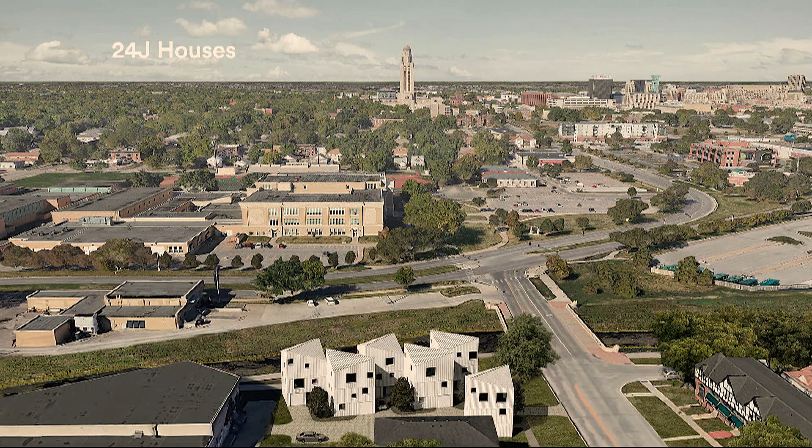So we work on many different kinds of buildings, but today I want to talk about houses, how we think about them, how we design them, and how they represent the act of living. And I want to begin with a question: why won't Americans accept the promises of social housing? This is a question that's bothered me for most of my career, and responses to this often assume that the issue is about access to housing relative to financial, social barriers, and then urban planning problems, potentially a problem of misaligned policy. But we argue it's also a cultural problem, a misalignment between the mindset, imagination, and desire for places to live with other people.

Like many multifamily projects, maybe most multifamily projects, the articulations of the building may attempt to adjust to perceptions of scale, but they rarely correlate to the individual home within them. And sometimes these articulations are due to planning restrictions, urban design guidelines, and so on. But we aren't seeing the home, we're seeing the collective. And I think this is a challenge for a lot of Americans who still have a desire for the single-family house.

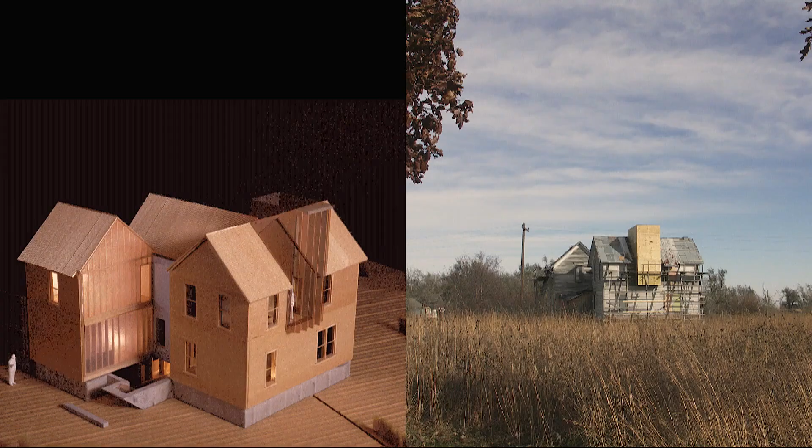In writing an update to J.B. Jackson's evolutionary story, David Heymann, who's a professor at UT Austin, states that Jackson uses this westward movement to document changes in the value and nature of land, from a source of connection to a foreboding cosmic order, to an optimistic and limitless physical commodity, and to a disconnected and transformable economical value in each case of the landscapes he describes.

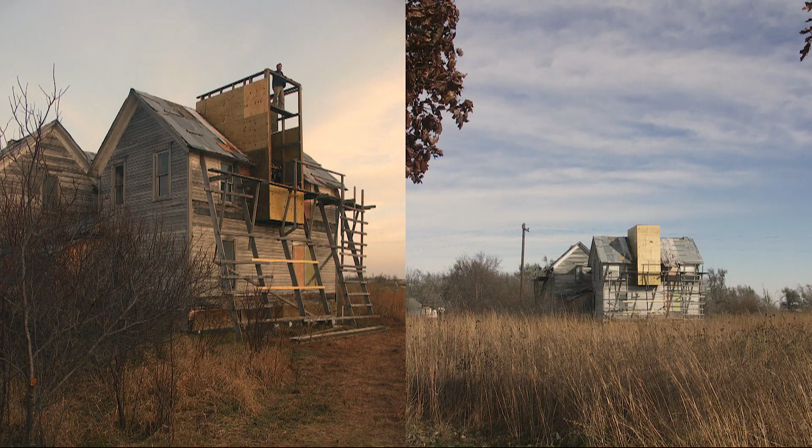This project here, just briefly to describe it, is we bought the house, moved it to Art Farm, working with the students, in fact, started to convert this as a space for artists, particularly writers. There are other buildings at Art Farm that function as art studios for painters and sculptors and conceptual artists, but this is really a place for writers to gather and to sort of observe the land and to work on their projects in a very challenging environment.

So jumping very quickly here, Le Corbusier, one of the most famous architects of the 20th century, wrote that a house is a machine for living in, but it is also a device for framing the relationship between people, buildings, and landscape. The cartoon here on the right is, I think, one of the most important works of architectural history. This is a Mexican cartoon from the 1960s about the life of Le Corbusier. Very interesting and full of action, maybe action that didn't really exist, but it's fun to read.

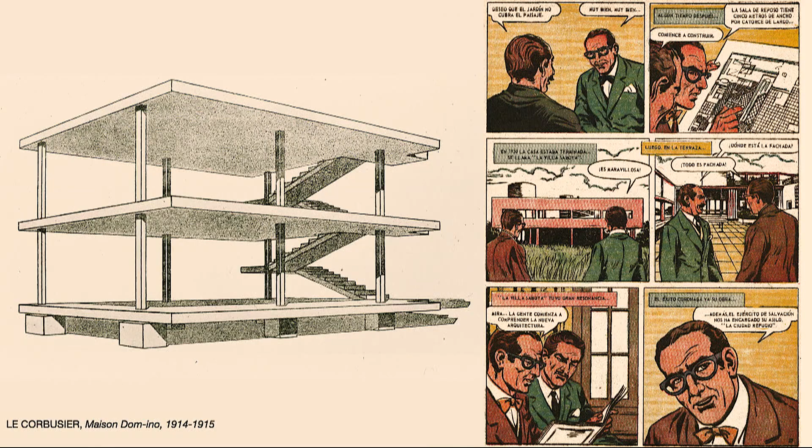And in this, the client is asking Le Corbusier to design him a house that is open to the garden, but that doesn't obscure the landscape. The result is Villa Savoye, one of the most famous houses from the early third of the 20th century. And Le Corbusier didn't just design a house to work with the landscape, he changed the fundamental relationship of architecture and landscape, lifting the garden to the roof and opening all the walls to the surrounding landscape with a ribbon window. At the end of this passage in the comic book, the client says, "Well, where's the facade?" And Le Corbusier says, "It's all facade," which I think you could read in multiple ways.

But so ultimately, Le Corbusier reduced living in a house and the life of a house to a sort of discrete set of mechanistic techniques that he called the 5 points. And architectural history can take it from there. I'm not going to spend time on that. But these experiments to imagine the house not as an artifact stuck in history and psychology, but as a response to new ways of living and the current demands of society taken head on, these are more interesting to us, I think, in the sense of how the house is changing over time.

In the 1940s, Austrian-American architect Friedrich Kiesler argued that Le Corbusier's functionalist manifesto Towards a New Architecture, in which he claims the house is a machine for living in, served as an important guide for architects between the First and Second World Wars, but that a new manifesto was needed after the Second World War. He argued that it's a fact of growing importance that the house of the family is not only a machine for living, as Le Corbusier put it, but it is also a nervous system.

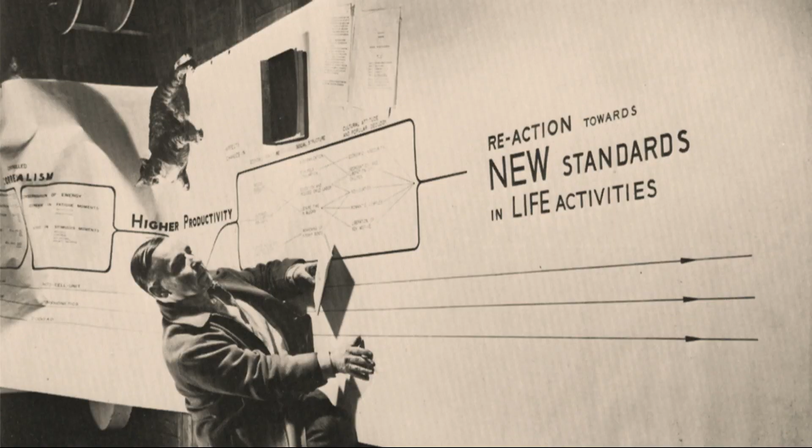So some of our own work takes a rather different approach. Rather than thinking about this as a holistic way of merging life, we took a project here, we called it Hexad, and pushed in the opposite direction towards a kind of extreme functionalism. This is actually an art/architecture commission that remains unbuilt at this point, where we used a pure form to examine a kind of siteless architecture that takes the Jefferson Grid as the site itself.

So settlement, as we know, depends on an infrastructure and an ideological attempt at organizing territory, wiping out what existed before and establishing a new order. Our project asks, what would a house that followed the now obsolete rules of the Jefferson Grid actually look like? So the grid that we live in is based on a series of obsolete measuring devices.

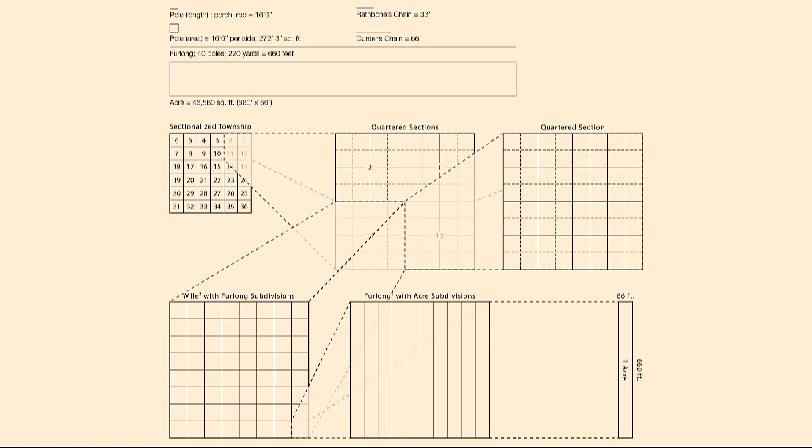And not to spend too much time on this, but it is worth noting that about 75% of the continental US is based on the stamina of 18th century oxen. Odd to think about that, but when you drive down county roads, think about what you're driving through.

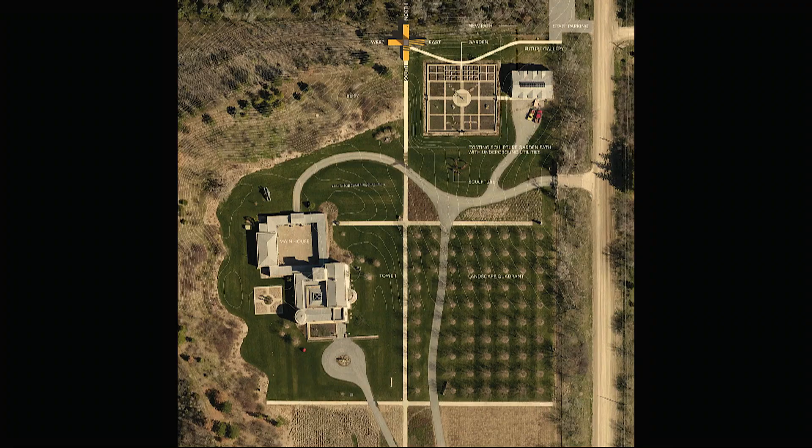Our site was on a property, a large property outside at the edge of Lincoln by the 80 to 180 interchange. A residence established there and a building designed by the historicist architect Dimitri Porphyrios that also has a miniature grid within it. And we were commissioned to design a residence for a caretaker that would also act as a part of the sculpture garden. So trying to find a form that works, a three-dimensional form that works with the grid, just as rational, just as unforgiving.

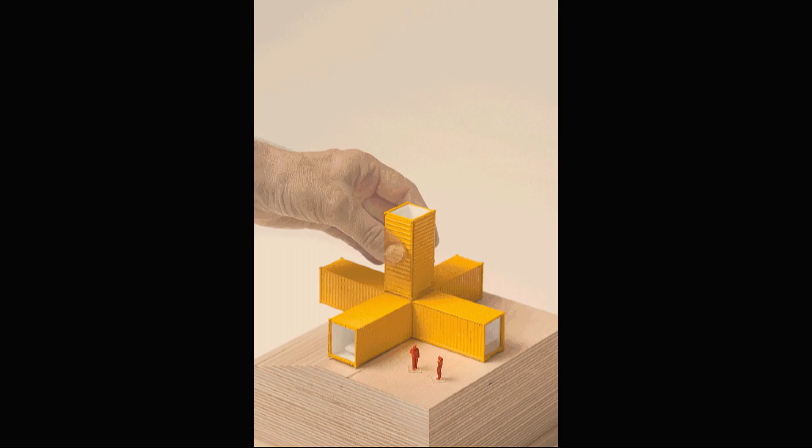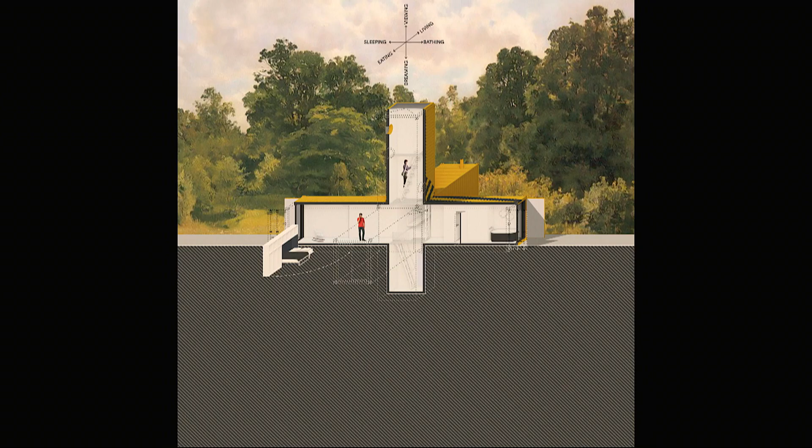We finally settled upon this, which is a tetrahemihexahedron for any geometry fans. A pure form that allowed us to think about the pure inhabitation of limitless space here. The client wanted to build this out of shipping containers, so we sought a way to combine containers together into a form more or less like the pure form of the tetrahemihexahedron, and then started to divide the living spaces into the various sort of vertices of this as they extend out into the landscape.

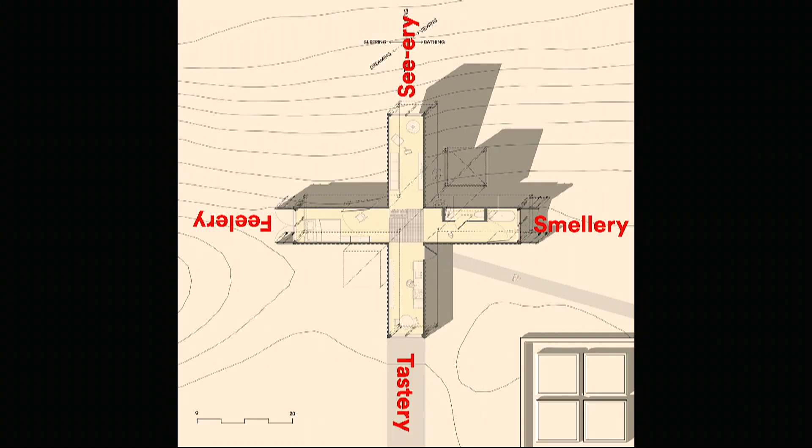And the hyper-rationalization of the building sort of leads to a hyper-rationalization of how one lives in a house, so dividing functions into pure spaces, the living, the bathing, the eating, sleeping, and so on. Also made me think about Georges Perec's Species of Spaces, if any of you have read this, where he argues that maybe we should start naming our rooms after other things such as senses, so the seeery or the smellery or the tastery and so on. Or days of the week, which today we'd be in the Tuesdayery, but UNL can't afford that many lecture halls, so we have the everydayery here. But Perec also argues for useless rooms, not only rooms that have no precise function or multi-purpose rooms as we call them today, but entirely afunctional spaces.

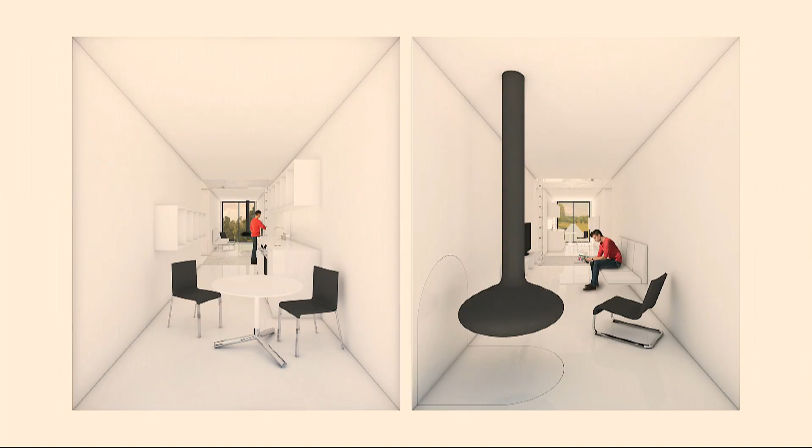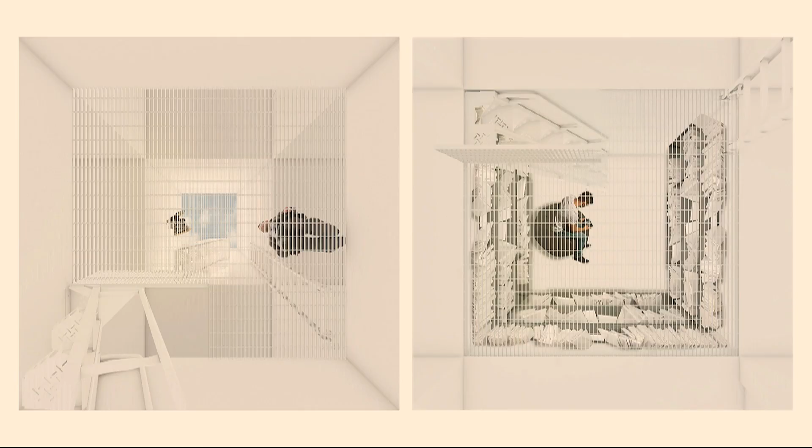So in this project, the horizontal axes of the tetrahemihexahedron are divided into the eating and living spaces here, or in this side, the sleeping and bathing opposite one another. And then in the center is this uninhabitable space with a grid that's just a grating, so you really can't do anything on it. And it's a space without use, as the Dutch architect and situationist Constant would say, a coincidence room. Finally, we've got the two vertical spaces in the vertical axis, the subterranean and the aerial space for viewing and dreaming above, and space for reading and contemplation below.

And not just by chance, I happened to grow up in this town of Christchurch for part of my youth, so about 5 hours away by car. So it's familiar territory in some ways. The house sits in a former sheep station that's now being restored to a more or less native landscape eventually. The house has views. Every room has a unique view to this landscape looking out at the Southern Alps.

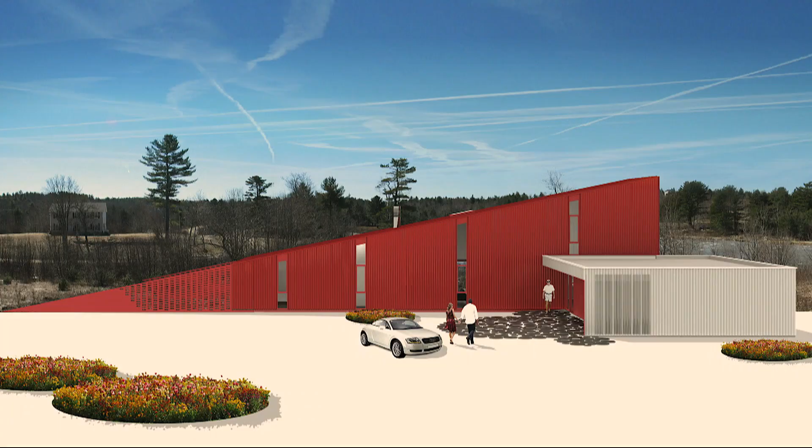But we had this design, and we were commissioned to make it a house plan set for sale on a website called Hometta. We made a few modifications, but ultimately, basically, the house is what we designed for Maine.

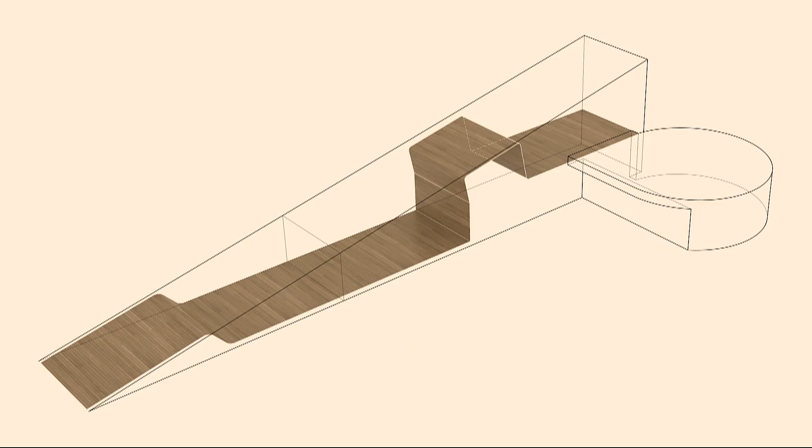It's really a simple dwelling that divides spaces into two basic categories. There's the level of living on the ground floor, living room and dining area, and master or main bedroom, and then two other bedrooms on the upper level. So a smaller program upstairs, a larger one below, and this sort of ribbon-like spatial divider, in the case of the house being in wood, sort of wraps those spaces and defines them very clearly.

Just because you think architecture is expensive, there is a free download for a gingerbread house version of this, if you happen to want this. So think about this at holiday time next year, or later this year. I haven't actually made it, but it seems fairly straightforward.

So the original wedge house, if you think of it as a ready-made, then in the sense of Marcel Duchamp's work, the Wanaka wedge house is an already made. It's like a remaking of a ready-made. An instance fitted to a specific landscape, and in this case, our role as the designer is not to design something new, but to take the existing already made and fit it and adjust it and edit it to work on this site.

So we did make some changes. We made it a couple of feet longer, dealt with orientation, of course, and the roof height in order to meet planning codes and other rules. We also changed all the materials. It's built in an entirely different way, based on New Zealand construction systems and using the New Zealand vernacular of painted corrugated steel, and then interior spaces that all open up into the landscape in very interesting and different ways, highlighting close moments as well as those in the distance.

The top and the bottom of the wedge become really different environments despite the rigid form of the building itself. You have the high piece facing up to the ridge. The low end of the project merges into the landscape at a rock where we sited the house in a very peculiar way. And then it just sort of dies into a beautiful garden and protects from the wind and creates an outdoor space for the two residents. But the severity of the form is maintained from the very tip at the bottom to the very top, and it's very unrelenting in its form.

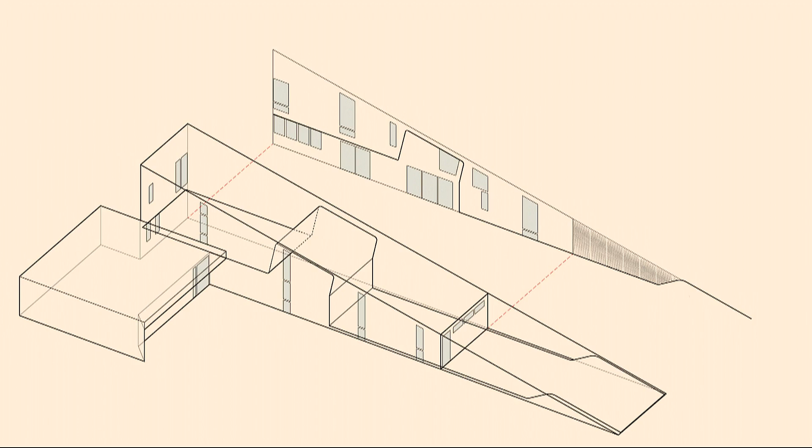However, the windows and the fenestration, as we call it in architecture world, are much more chaotic. They don't conform to the geometry of the building as much as to the way we live inside it. So the windows alternate between views and ventilation functions, solar functions, and so on, and are defined by the interior spaces of the house. It faces northwest towards the Southern Alps into the valley with the Lake of Wanaka off in the distance.

And then as you can see in this section image, there's the double height space with the living room kind of in the middle, and then a space with 2 bedrooms above, a bathroom above the kitchen and dining area, and then the main bedroom on the other end facing the garden.

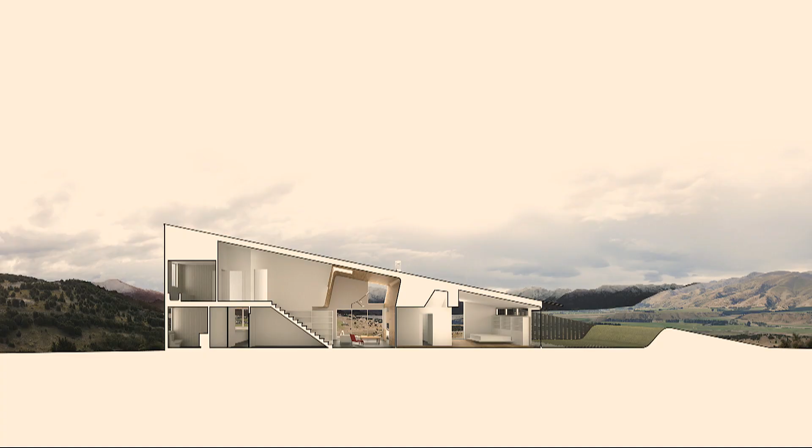The spaces are conformed to the geometry of the house and then are alternated between the 2 levels at this end with this wrapping kind of wood surface that curls around the space, allowing one of the rooms up above to open to the space below, and then to articulate a kind of a connection between upper spaces and lower spaces in a very simple linear hallway that runs the length of the house.

The materials on the interior, the concrete floor has pebbles from the Clutha River down in the valley, and it's ground so that those are exposed almost like a terrazzo. They have a really nice collection of contemporary New Zealand artists, so we worked around some of those artists to think about how that work would be displayed in the house.

And then the wood that you saw throughout all these images is eucalyptus from a farm in Canterbury, a few hours away, custom milled to wrap these curves and fit the house.

For any assistant professors in the room, the wood is actually a retirement project created by a sociology professor in New Zealand who, when he was an assistant professor, planted a eucalyptus tree farm. And then when he retired from teaching as a full professor, he harvested the lumber and he mills it and sells it to people. So if you're thinking about your next path as a professor at the university, start planting.

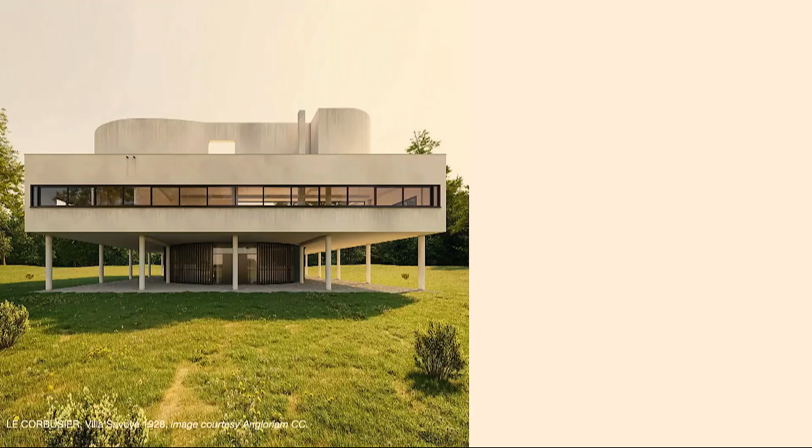This is Le Corbusier's Gardener's Lodge. Anyone who's been to the Villa Savoye knows that there's actually an ADU at the Villa Savoye. Everyone talks about ADUs, but this is nothing new. There's a Gardener's Lodge that uses the same techniques, but it's only a 30 square meter residence, very small. But it has the same 5 points, so it's lifted up, roof garden, ribbon windows, all the things you'd see in the larger version of this. And it's a way of scaling down the residence, but thinking about it very differently in terms of what happens.

So we argue that when you scale down a house to build a small house, things have to fundamentally change. You can't just take the suburban 2,000 square foot house and reduce it to 800 square feet and have the exact same arrangements of space.

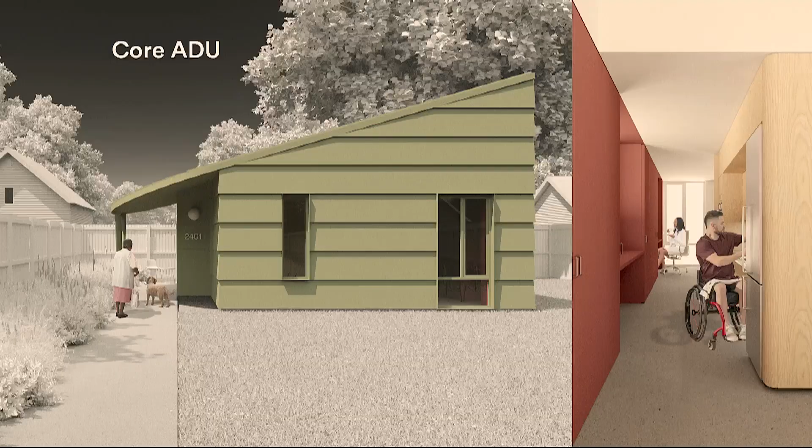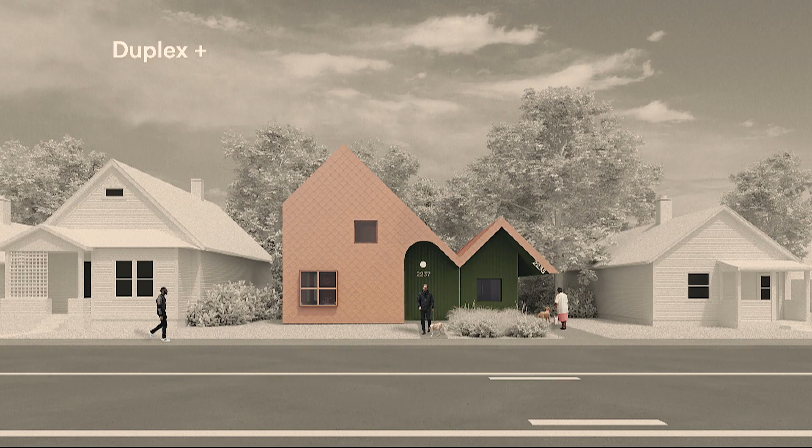We've become really interested in this kind of dwelling possibility in Omaha. We entered a competition a couple of years ago for an ADU in Omaha. Omaha is starting to create a set of house plans available to all, and we contributed one that is an aging-ready, accessible dwelling, but fits Omaha's ADU rules, which are complicated planning rules, but nonetheless very generous for people to be able to build backyard cottages.

But we're also working on other kinds of infill housing. This is called Duplex Plus, which is another competition that we won, in this case for rethinking the duplex in Omaha. And again, the city is hoping to make these plans available as pre-approved designs for people to use.

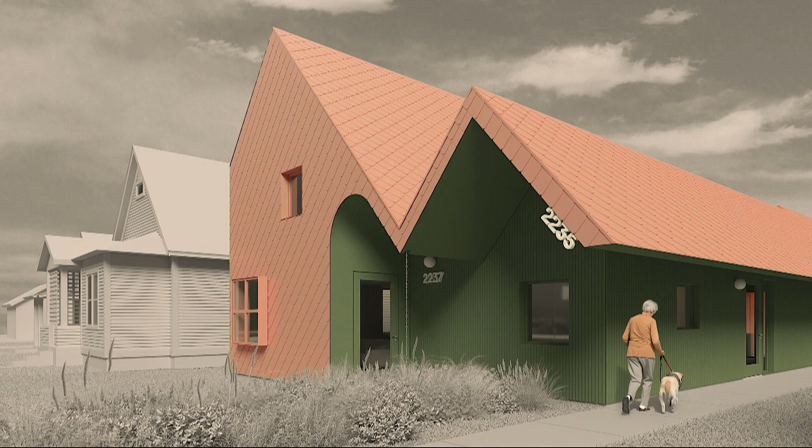It's aging ready, so it's really thinking about what happens when people get older and what are their needs. AARP has a very clear set of guidelines to help designers and residents think about what they need. But beyond that aspect, we were really interested in taking this understanding of a duplex, which is usually thought of as a mirror image of two houses that have nothing to do with one another, and think about it as being something that has differentiation within it, to think about the different people and how they actually

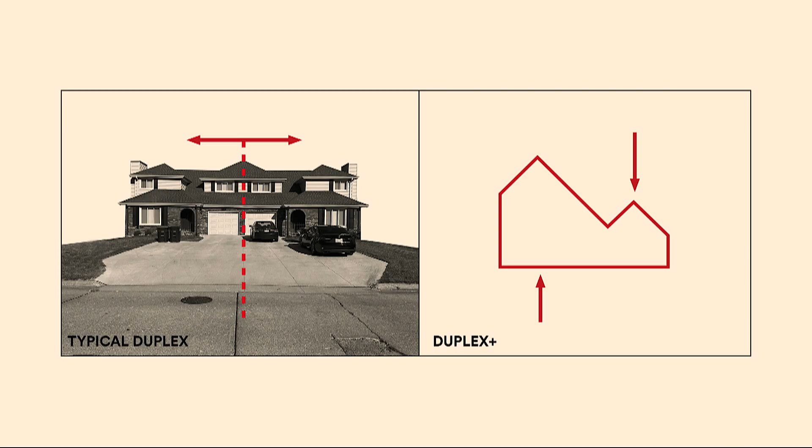inhabit the space. So we came up with something that has 3 fundamental units, if you forget the garage. There's a 3-bedroom dwelling, an age-friendly 1-bedroom dwelling, and then a shared flex room. But I think what's really interesting about this project is the different ways that one can put this together. So you could have a multi-generational home where it's a single family. You could have parents living here, family here, grandparents down here, guests, and so on.

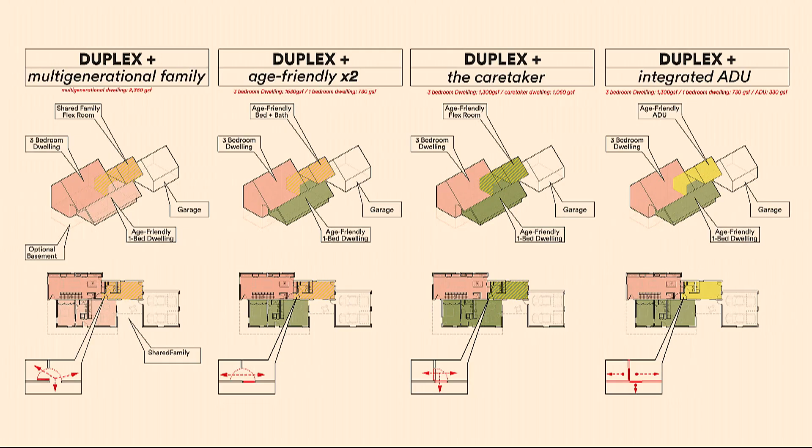You could have all 3 being separate. Actually, that's this one here. So you could have a house for a family, you could have an ADU that has its own entrance, and you could have aging-ready residents here, and then you could have various mixes of those where you could have a caretaker taking this and working with the person or people who live in here, and a separate family here, or this unit could take that over and an older person could live here and then a younger family here.

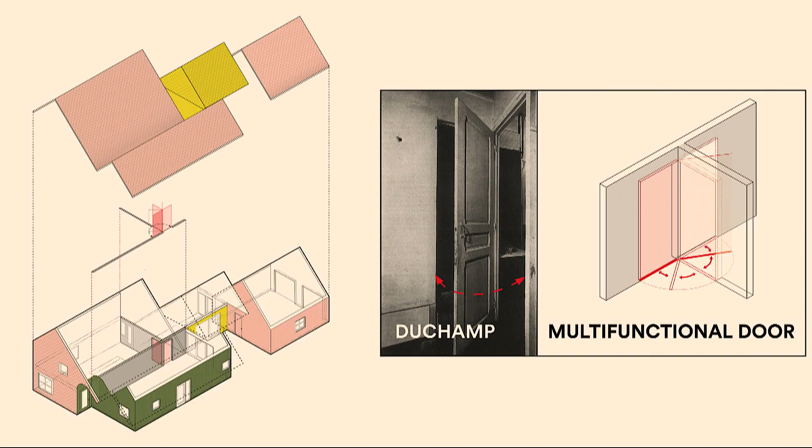So it could be used in many different ways, and we accomplished this through a device we think of as the Duchamp door, borrowed from Marcel Duchamp, whose apartment in Paris had a door that either closed a bathroom or a kitchen from a living space. For Duchamp, the interest is that the door is always closed and always open at all times. But for us, it was really a way of thinking about how do we open these different spaces to one another and allow them to work in a multifunctional way to tune the house for whoever happens to

be living there. So the door exists here, and it's actually a double door, so you can close one, open these 2, you could open these 2 to one another. You can open it different ways, or you can fold the doors away entirely and allow people to live in this house in a very flexible way with access to the outdoors and so on.

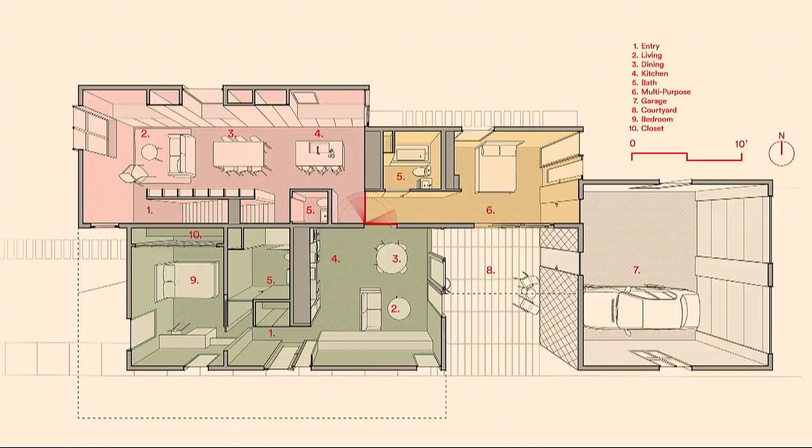And it's designed to fit in Omaha zoning for duplexes on the lots that are sizable enough to allow for duplexes, but working with the setbacks, adjacencies, and all the things you'd find on a typical lot in Omaha. If you have an alley, you could have access for parking from the alley, but there's also room to have a driveway along the front.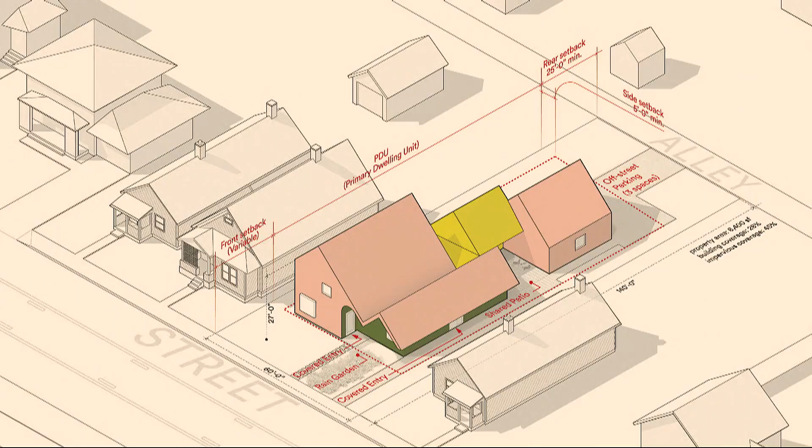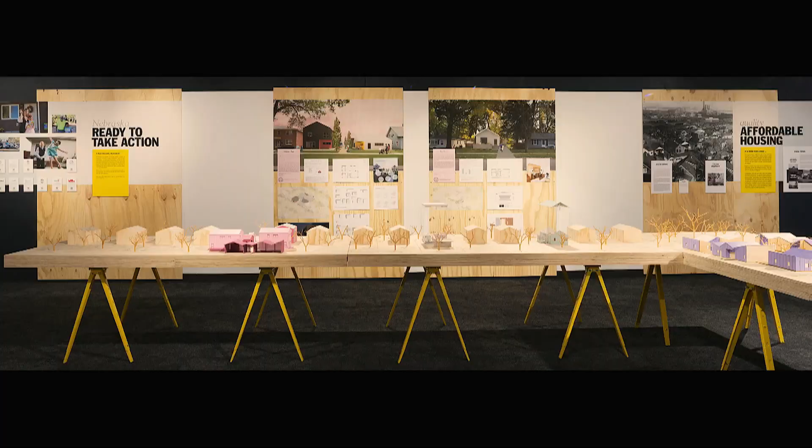So rethinking the house has been part of our work for a long time. It's also been part of the FACT studio for a number of years. During the pandemic, we worked on a project called the New Attainable House that culminated in an exhibition at the Nebraska History Museum, and then a catalog that we've published to document that work and to share it more broadly. This was a follow-up to an exhibition called Evicted by Matthew Desmond and the Eviction Lab at Princeton University. It was a traveling exhibition.

So we used the same language of that exhibition to design the exhibition that we created from the studio. But it's socially distanced design build, because all the models are set about 6 feet apart from each other so that people could go through. They only let 5 people in the gallery at a time, and they had to stay their distance. We have 6 different projects, so people could move around and see the projects as they needed to in a safe way.

The project emerged as a collaboration between the FACT studio, which was an architecture master's studio at that time, and the planning studio, working with Frank Ordia, who is teaching that studio to community and regional planning students. We formed teams of architecture students with a planning student, and each team worked with a different community design center or nonprofit developer in Lincoln and Omaha. Each of those developers came with a series of requirements and interests, and then each team worked on redefining what the house would mean within their interests.

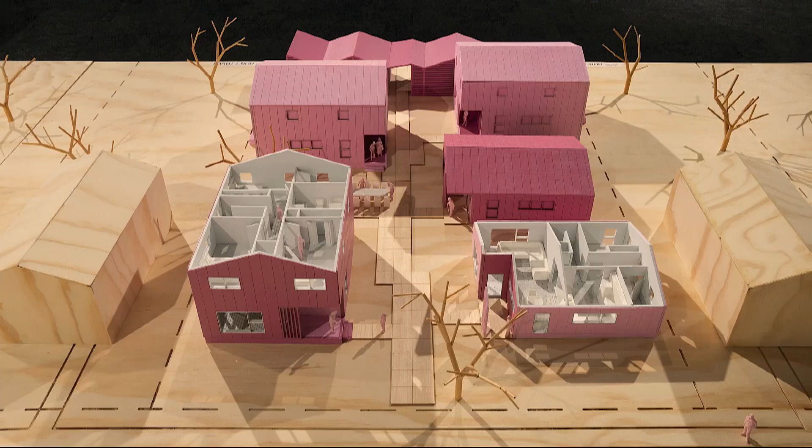So for NeighborWorks Lincoln, we worked on a double lot merged to create a cluster housing development, in this case 5 houses plus parking off an alley, using an interesting mechanism that NeighborWorks was pioneering in Lincoln, the Community Land Trust, where the land is held in common in a trust while the houses can be sold individually.

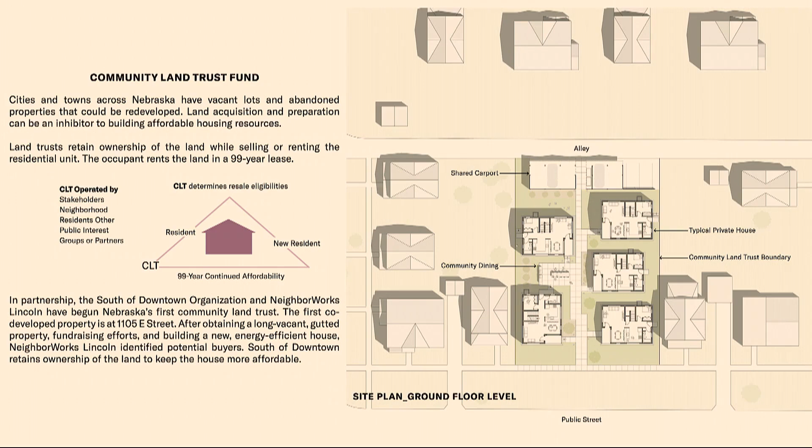And what's really wonderful about a community land trust, not only does it reduce the cost of the house to the purchaser because they're not buying the land, but when they sell the house, they can realize appreciated value of the house itself, but they're required to sell the house to someone who has the same economic situation as the development is set up for. So say they have to sell to people between 80 or 120% of area median income, even if they own a house for 20 years, they still have to sell to somebody within that demographic.

And that maintains the affordability of the house or the land over time, and it prevents speculation or gentrification from taking an affordable house out of the world of affordable housing. But it also allowed us to create things such as shared outdoor spaces like this gathering area here and gardens and so on between the houses that everyone would get to enjoy because the land is maintained in common.

But one of the other goals of this was to think about how developments like this could fit into existing neighborhoods without fundamentally changing their character. And so this project achieves that through scale, but then I guess sort of the vaguely familiar qualities of the form of the houses, while borrowing from maybe the more vibrant colors that one sees in the neighborhood.

And then that brings me to the last project I'm going to show today, and this is a project we call Our Story. It's an initiative we started a couple of years ago, working with Partners for Livable Omaha, run by Jessica Sherman in Omaha, who's been a collaborator on a few different FACT projects. And this is an attempt to design small, aging-friendly homes for infill lots in Omaha.

So generally, if you think about houses in the United States, this gets back to this American dream issue. The typical American house is 2,100 square feet, and the first 2 Our Story houses are 802 and 618 square feet. And so to achieve this, we had to think about this idea of compressing the house and fundamentally changing it to work at those small scales.

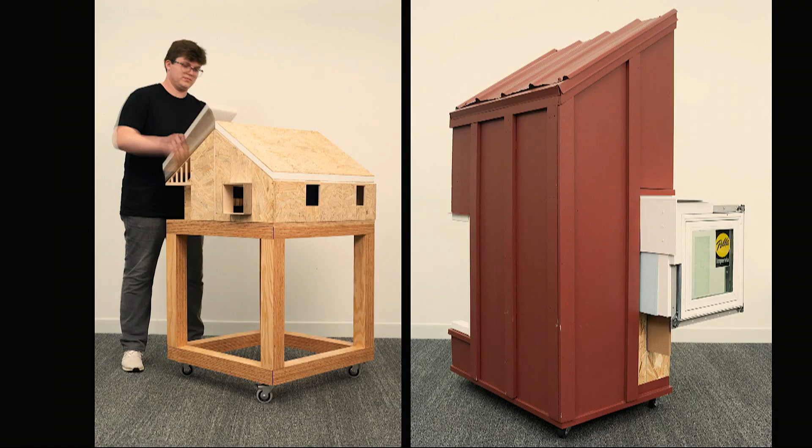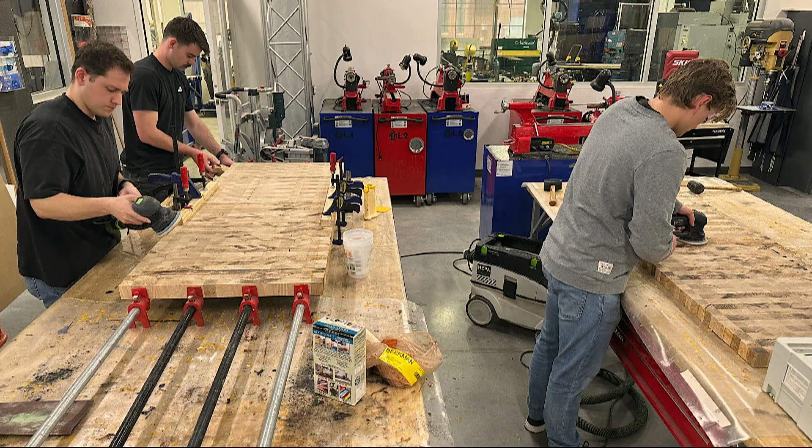This is the cohort of students who began the design phase of this project in 2024. All of them continued into 2025 with some additional students. I don't have an image of the spring semester, but it's just a few more people. And this is typical of most FACT studios, we work through large-scale models and full-scale mock-ups that are full-scale chunks of buildings to allow us to test the building systems. And then working in Innovation Studio here at UNL, we self-perform certain tasks that would become incorporated into the work.

And so similar to design thinking, design thinking is a way of using design to solve problems. The three core requirements of design thinking are desirability, feasibility, and viability. And no innovative project is really going to be successful unless it addresses all of those areas. I would add to that responsibility, thinking about the ethical and social issues around whatever the project might be.

So the Our Story houses are designed for a 60 to 120% area median income range, which is essentially middle income workforce housing, and that's fundamentally where the funding came from for this project through Spark. It's ultimately state funding from the Middle Income Workforce Housing Investment Fund.

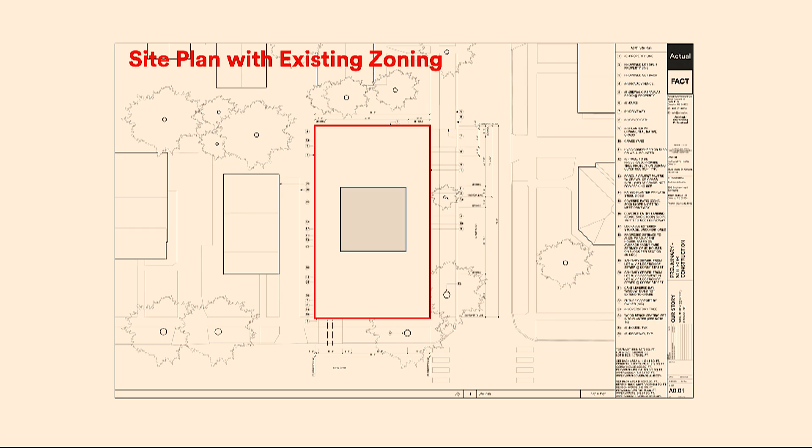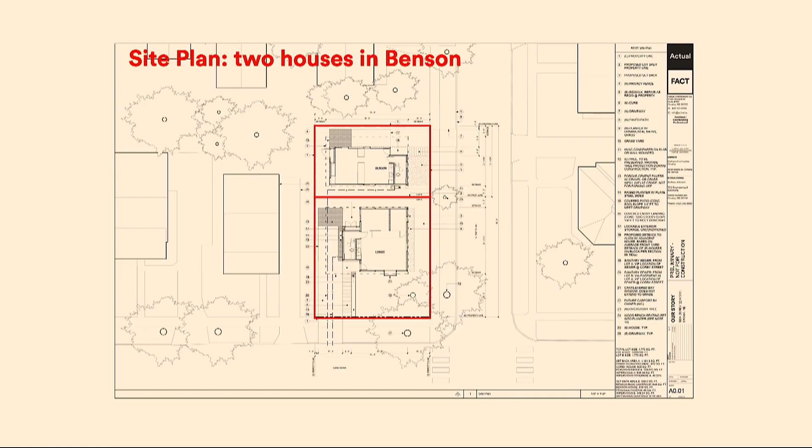We originally started with a property we secured in Benson in Omaha. The gray square would be what we could build by right without having any variances or conditional use permits. But the city actually convinced us to split the lot in two and build two houses, which would increase our density here by two in a small neighborhood. But it also allowed us to really lean into the idea of the small house, the small lot, and the idea of shared legacy within the city.

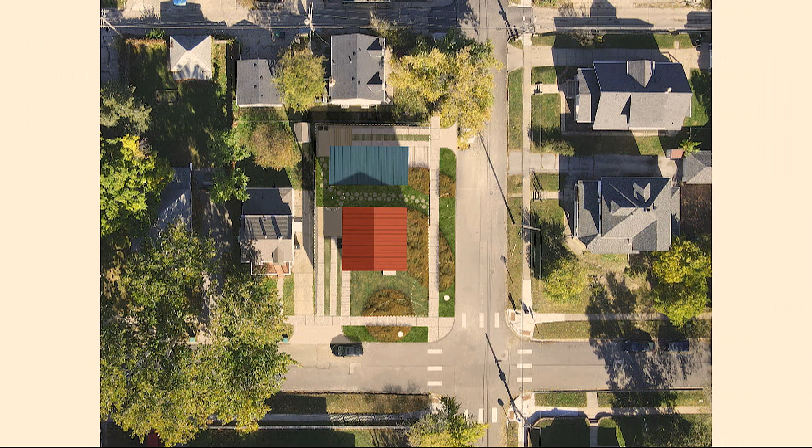We went through a process that ultimately required a city council vote. The city council was very enthusiastic and approved it unanimously. And these houses are now under construction, hopefully to be occupied by August this year.

So these are the first two houses in renderings produced by the students. And we're thinking of these now as a system of houses that we could use in multiple futures. So thinking about houses as systems is not new. And there are a lot of examples of prefabricated housing systems. I'm going to show one of them here, which is the Lustron House.

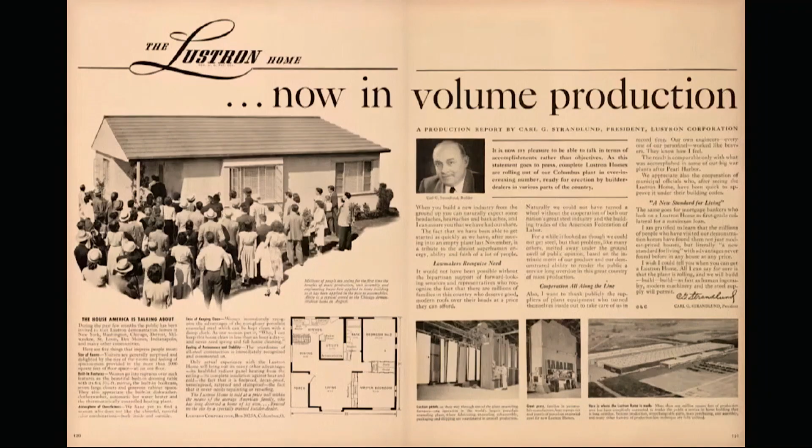This was a company formed, like with many others after World War II, to repurpose military production facilities for housing, with the great need for housing after people returned from the war and started families. Lustron sought to build houses using everything built in the factory, but using sort of industrialized systems. It's all panelized. It's made out of steel and enamel and a series of components. The house plans are about 1,000 square feet for most of them. There were a few variations.

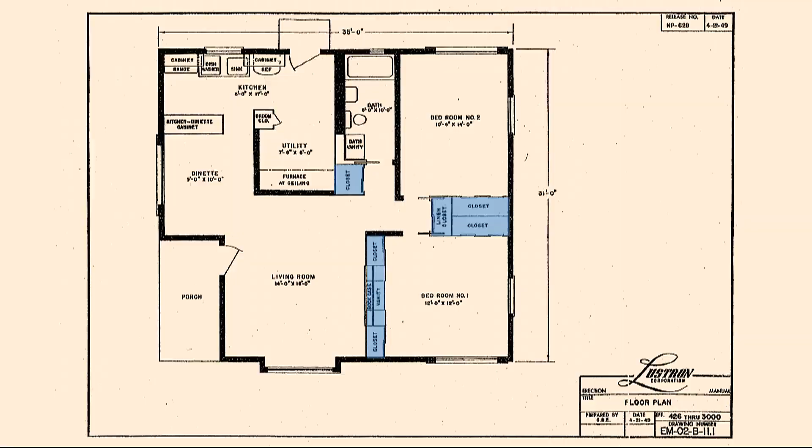One of the things that we thought was interesting about these, which inspired us in the Our Story project, was that the cabinetry or storage units of the house are built like movable boxes, but then placed as dividers. So they actually take the place of walls. And that's something, this is one of the plans from one of these houses, that the kitchen and bathroom and then the storage is all consolidated in these two blocks. And that's the only way that interior spaces are subdivided through that fabrication system.

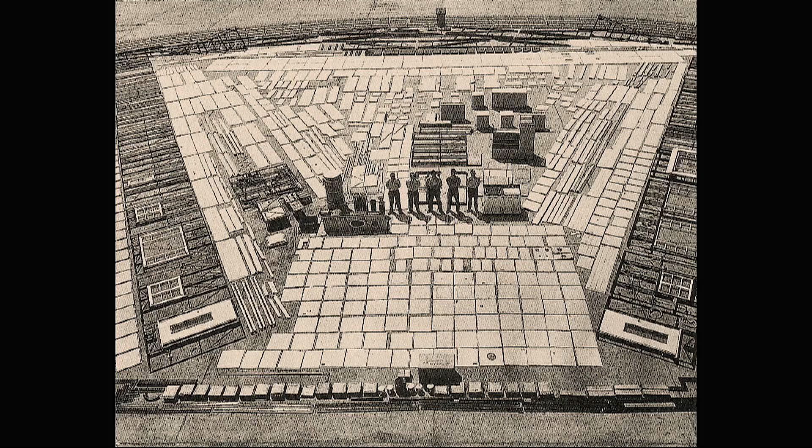So Lustron houses were 100% factory made. They had about 11 to 13 tons of steel, about 1 ton of enamel, and about 3,300 prefabricated parts. Everything built in the same factory. They intended to sort of roll these out, but of course tooling up and setting up the factory took a long time. Costs soared, and they only produced about 2,700 houses before going bankrupt 2 years later in 1950, despite the huge demand for housing. People do like to collect these houses, so there are maybe 1,500 left in the country in various places.

So the failure, which was very direct, had a lot to do with the high upfront cost. Everything had to be sort of pre-paid to build the factory and so on. They had technical problems like marriage walls between parts weren't matching. The United States is sort of an agglomeration of non-standard building codes. Building codes are local, so every jurisdiction has slight variations, so it's very hard to build something that can go everywhere. And then the fact that they're all proprietary systems. Every single thing in this house had to come from Lustron. There was no other possibility. So they essentially lost out because of poor planning and the vertical integration of the industry.

Other developers like Levitt and Sons, the Levittown housing production company, perfected a different category of mass production on site using more standard fabrication techniques. Still some prefabrication, but not a lot. And they were able to speed up construction, but also to work with existing workforces and skills without having to be so specialized. And that sort of inspired how Our Story works.

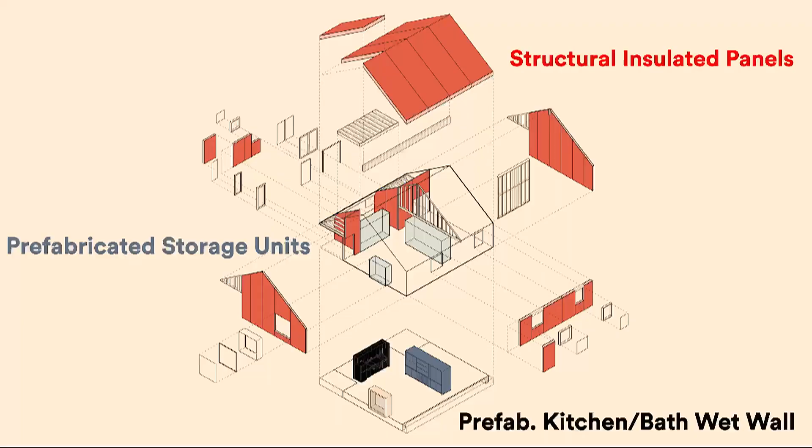And we think of these houses as a kind of prefabrication, but none of the parts in these projects are proprietary. We have structural insulated panels, which is like a sandwich panel of foam and oriented strand board for the walls and roof. And that's a standardized system that can be built by many different companies. There are many companies around the country. The prefabricated storage units are basic cabinetry. In this case, the students built them, but they could be built by others. And then the prefab kitchen bath wet wall, we call it, a 10-foot wall that is kitchen and bathroom, all the utilities in that one piece, could be built, again, by almost anybody.

And so part of the goal of this project was to think about workforce development. And so Jessica is working on strategies for getting local folks to start building these projects. So this is just an example of how this system could be applied to a wide range of different house types. So you've got the basic units. The window is a sort of add-on, like a bay window. It doesn't have to be there, but it could. But then different configurations of storage wall allow this to configure to different forms of houses, different sizes. The kitchen and the bathroom never change. It might mirror image, but it never changes its dimensions.

And so then the interior becomes a very straightforward set of these pieces as an aesthetic that becomes the infrastructure for living, and then it has people's things. So there's the cabinetry, which could come in many different colors. The kitchen, we made it all black so we could merge it with appliances. And then the polished concrete floors is sort of an upgrade, you would think, in affordable housing, but it's actually a very affordable way to build because we have no floor finish. It's just the slab on grade with polishing. We are hoping at some point to expose some of the oriented strand board from the SIP panels, but that's an option that owners could take or not.

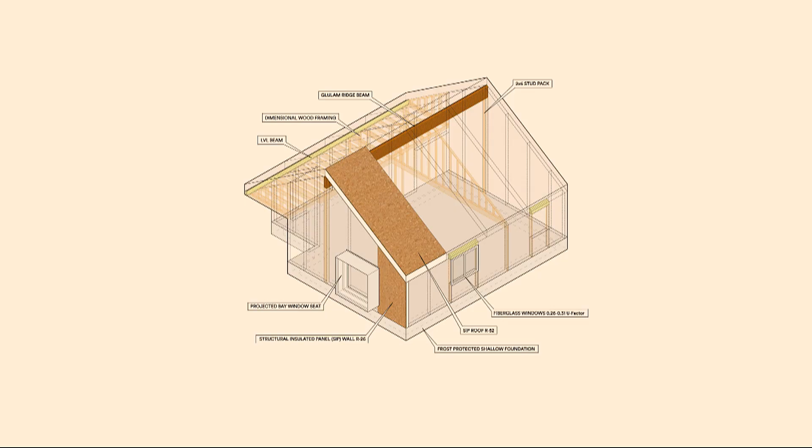And just sort of an illustration of some of the materials. The SIP panels are sort of these roof and wall panels. There's very little stick framing in this house, just a few pieces of wall here and there. And then a large glulam beam that spans the roof so that you can open up the interior entirely if it's not subdivided.

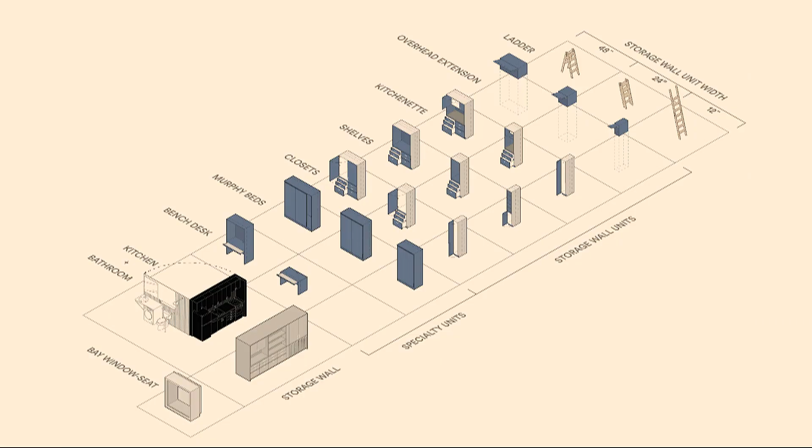These are some of the storage wall components coming in various different sizes to allow different ways of configuring the interiors. We built a ladder to deal with the loft. That's not an aging-ready feature by any means, but there is a loft, and so folks who do have the ability to use a ladder have a way to use the loft space, which is mostly just storage and mechanical.

Then, this is a student drawing, thinking about how all these components come together and trying to really think through standard construction, but then how standardized details could become unique and sort of unexpected, but still using very straightforward construction methods. So our goal is to build a catalog of these houses and make them available. We're working with the university, with New Tech, to come up with a licensing agreement that will allow us to share these.

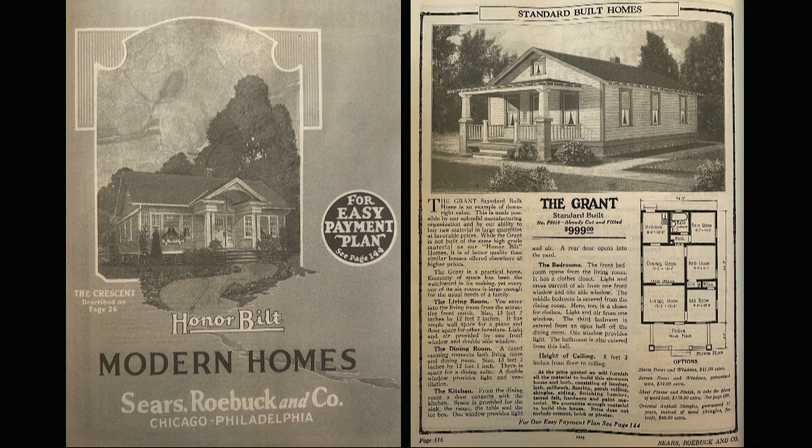And like the Sears catalog of houses from 1926, we'll be doing the 2026 version. And I keep telling people, if the houses look like that, then we haven't really innovated. And amazingly, that's what most houses look like these days. So things don't really change. Although that house for $999 is actually the whole house. It's not just the plans, it's the house. So costs have gone up, but we're still working in ways to control that.

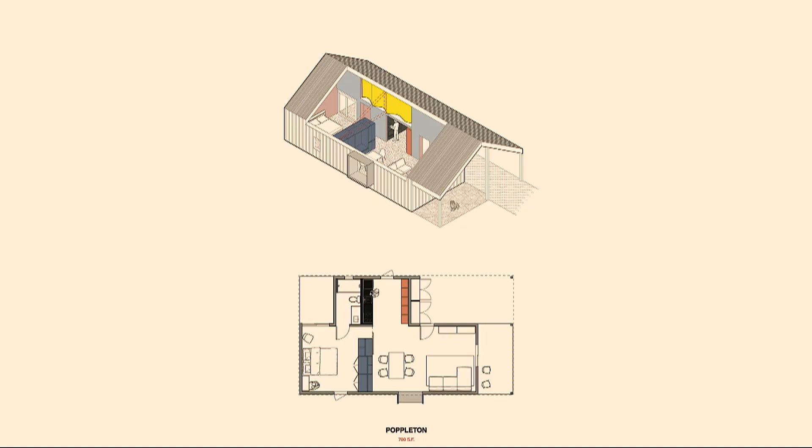So these are the first two houses. We call them Corby and Benson. Last semester, a different group of students, one of the things they were charged with doing was to come up with a range of different house types using the same systems. And so we're going to ultimately expand the catalog to include all of those. Structural insulated panels are 2.5 times stronger than stick framing, and this allows owners to realize long-term energy savings and potentially save up to 55% of the site labor costs due to the speed of assembly for structural insulated panels.

And in this image, one item of note is that the bulkhead wall, that framed wall separating spaces, is actually not structural, so that in other instances when we build the Corby house, we could leave that out and let this be one large open space, or include this or other forms of subdivision to change the way the interiors work. The large beam at the roof allows us to do that, and that supports the building for its entire width.

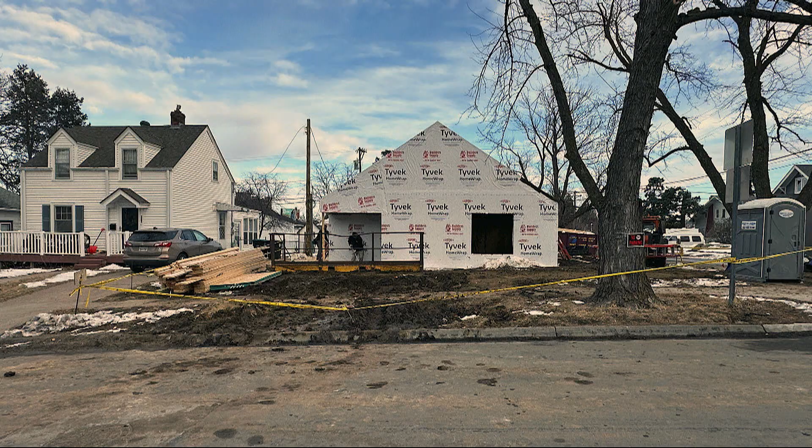On the exterior of the houses, these are iconic houses with vaguely familiar forms that fit into existing neighborhoods. Though the colors are vibrant, all of these colors exist in the neighborhoods, in surrounding houses. They may be the more vibrant colors in the neighborhood, but we feel that this is part of the way that these houses, although modern, fit into traditional neighborhoods. And you can see here, as construction is progressing, the form of this house is not that different from its immediate neighbor.

So our story considers the house as a device for community building and as an active community foundation. For our next project, we're planning to develop a pocket community, or sometimes these are known as cottage courts, by acquiring adjacent lots and splitting them to form a community of 4 to 7 houses with a shared access drive. And we're excited to explore this hybrid using the driveway as a sort of multi-use common area for the neighbors.

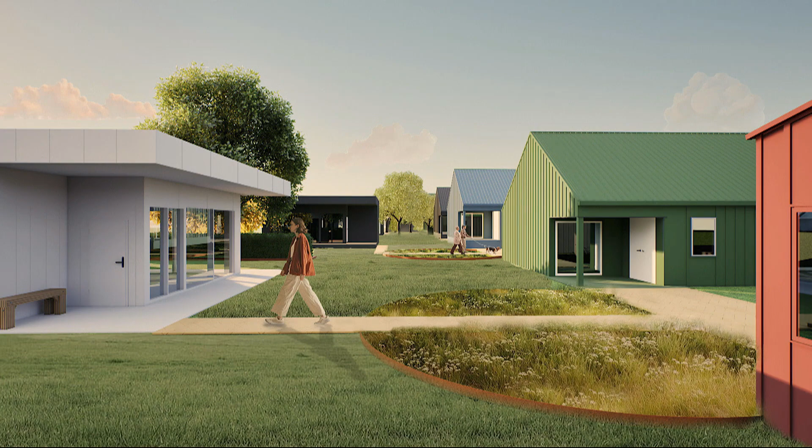There's a Dutch term called woonerf for a living street, and this is a space that people could really start to use. And so we're excited to start to develop community spaces in this kind of micro neighborhood in the center of an existing community somewhere in the Omaha area. The interiors of these could start to have more common areas, despite the fact that each house would have its own individual property. And we're starting to also work on the landscape for these areas.

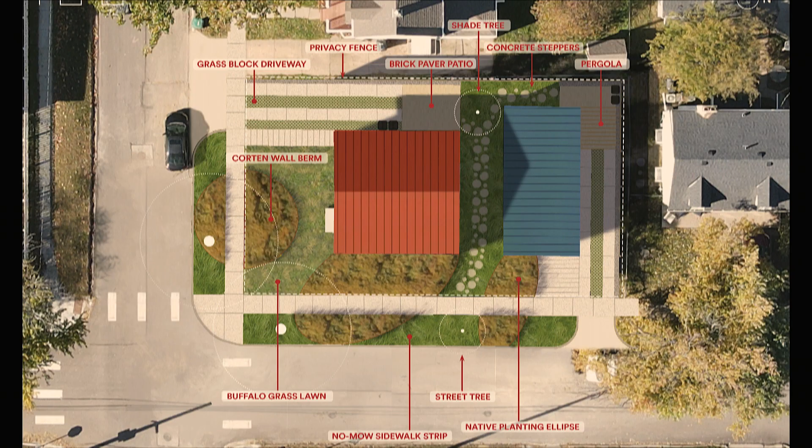And for the Corby and Benson development, we developed a kit of parts for the landscape, similar to the kit of parts for the interior of the house, that's designed for adaptability, accessibility, and aging in place. And we're excited to see this as part of the package of the Our Story system as we roll it out. Thinking about how the spaces between buildings become activated, both from an aesthetic standpoint, but also as an amenity for the owners and folks who live there.

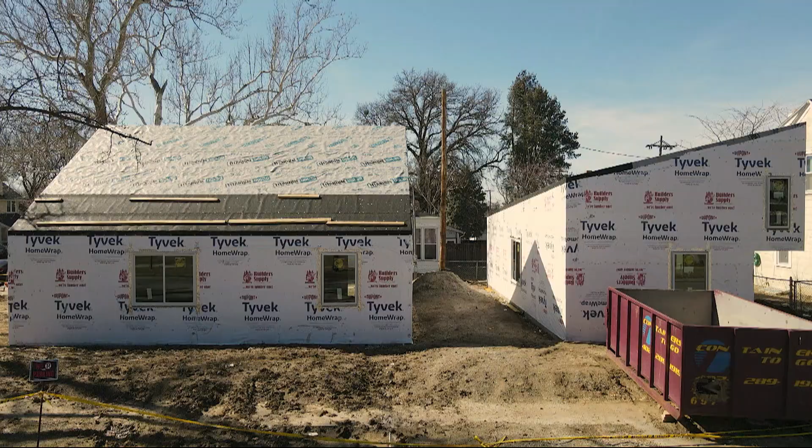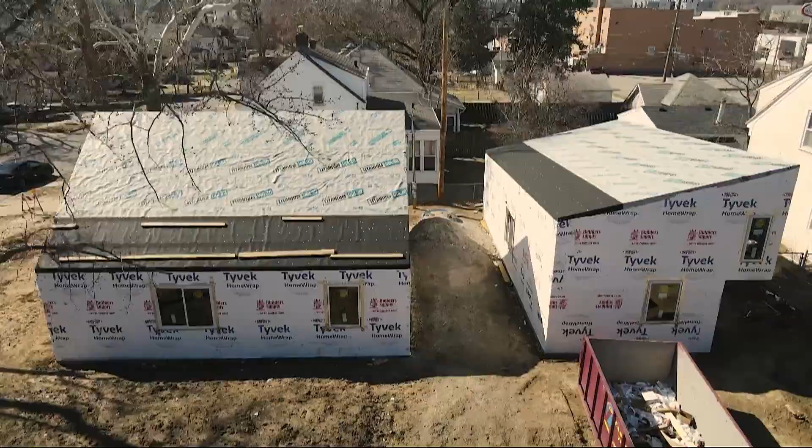So I want to conclude again by quoting from the Buell hypothesis. If you change the cultural narratives behind the single-family house, you change the city. Rethinking the house affords opportunities to maintain its relevance and to stake out a middle ground between the isolation and wastefulness of the suburban model and the impersonality of the multifamily complex. We believe that more of all forms of houses are needed to confront the housing crisis, but that the new small house must play an active role in building communities, especially in established neighborhoods.

And I'm going to conclude with a quote from Friedrich Kiesler from his unfinished 1940 book, Magic Architecture. The dream house must be neither a castle in the air, a monument to arrogant possessions, a scramble of fashionable styles, nor the sales product of gadgeteering. Contemporary man's home and his town must represent a conquest over technical difficulties with the aim of unfolding the inherent power of imaginative living, and there must no longer be a separation between the world of vision and the world of fact. Thank you very much.

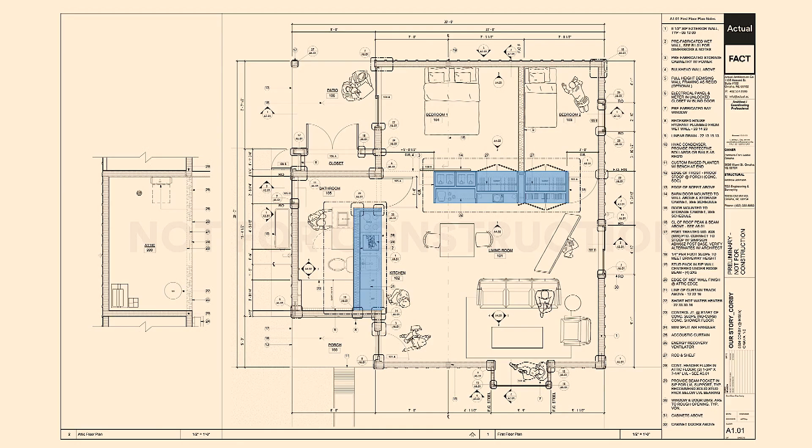And so it's a way of graphically showing that those two worlds exist simultaneously. Literally they don't, because people aren't going to move in until the house is finished. But for us, thinking about how design impacts living, and the act of design is an act of creating a living space, in the case of housing at least, it's important to think about those activities occurring almost in overlap. And I think it ties into the idea that houses or any building has a life beyond the life of the architect.

Architects tend to think of everything as about the great photograph they get at the end of it, and then things change. I've had projects get demolished. I've had projects have additions done by other people. It's just that they have a life outside of it, and I think having that occur especially in the design studio, that overlap of thinking about making and using at the same time, is really critical to imagining how these projects are going to have a life in time. So I don't know if that captures everything, but yeah.